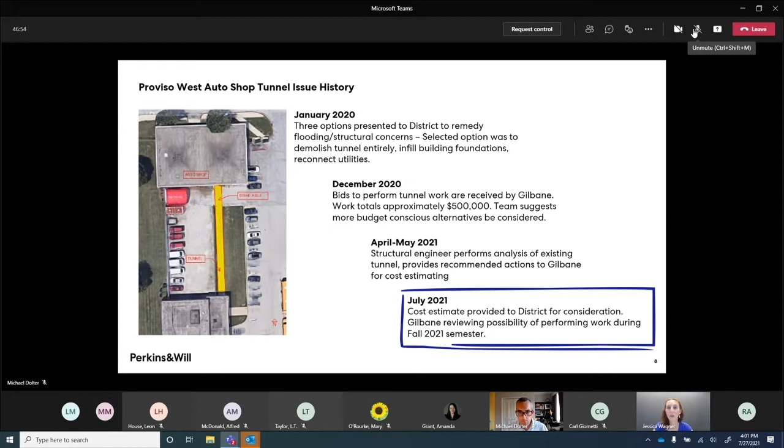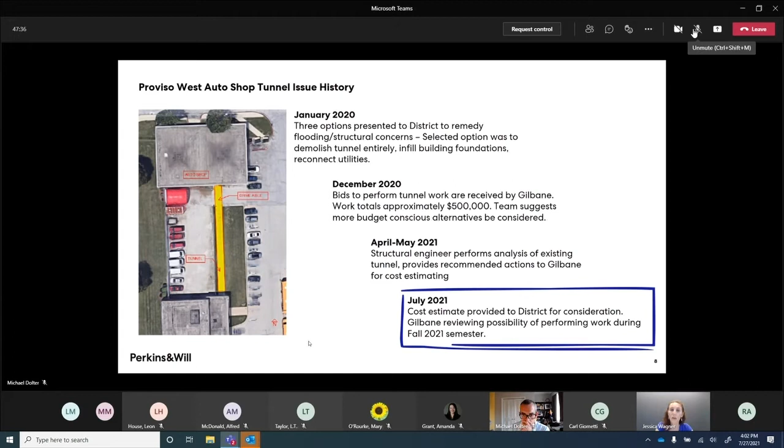So December 2020, bids came back, and at that time it was suggested that we try to pursue some more budget-conscious alternatives. This past spring, the structural engineer from C.E. Anderson went out and performed an analysis of the existing tunnel, and recommended actions were given to Gilbane for cost estimating. Now, in July 2021, cost estimates for this work have been provided to the district, and Gilbane is reviewing the possibility of performing this work during the coming fall.

So on this slide, you can see a selection of some issues that were discovered in the tunnel and at the terrazzo above. These first two images show some of the buckling that was identified just walking around the corridor, which gave us an indication that there might be some issues below.

When our structural engineer looked at this, there were a number of issues, but some of the more pressing ones were the deflected slab and the horizontal crack, as well as the corroded metal deck in the lower right-hand corner. There's also broken rebar, as well as cracks and spalls in the piers.

Diving a little deeper, expanding on some of these items: the design documents we have for the tunnel don't fully match the conditions observed in the field. There's some concern that either the depth of the concrete may not be as originally designed, or there may be differences between the concrete slab above it and the tunnel. The slab for the sidewalk and the tunnel are not supposed to be the same slab.

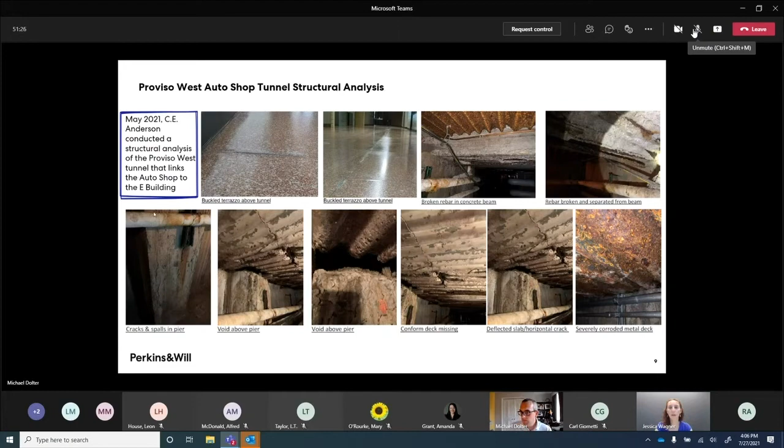So this is a much more extensive issue that has been identified for the slab there. I don't know if you're going to go into the original recommendations as well, Jessica? Not the original recommendations, just the current recommendations, but you can touch on the original ones.

The original recommendation really was - we went through 3 or 4 different options about how to deal with the water infiltration in this area, either by damming it off, the least expensive option, and finding some way to mitigate the water temporarily. Or, ultimately what was selected at the time was to take the cap off, backfill it, and essentially abandon the vertical walls in place, so this would no longer be an issue in the long term.

Every underground wall is going to leak water. It's just a matter of when and where and how much. So this is not atypical for an underground condition.

If you want to go on with that, Jessica. Sure. Okay, so at this point in time, there are two more budget-conscious recommendations.

The first is really only a temporary solution. It's to provide temporary shoring of the tunnel top slab, and this would allow vehicles to drive over this area. I believe vehicles in this area have been suspended, but this would be a temporary solution so they could at least drive on there again.

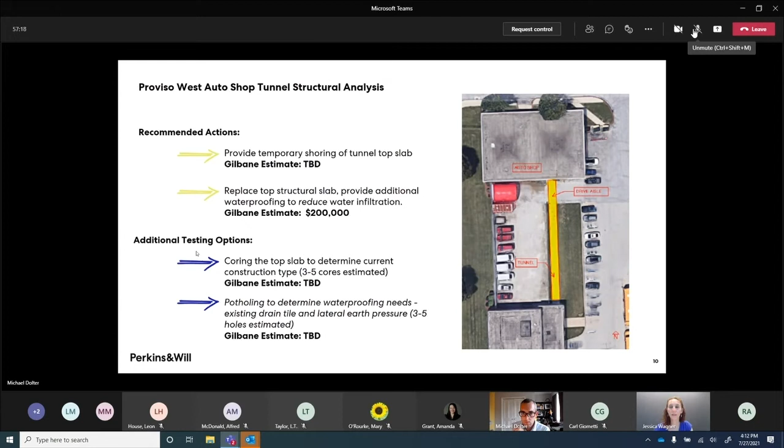We can, yes. I had a question, go ahead. For that tunnel, is there any way we can get pricing related to the shoring? It's really hard to hear you. Is there any way you could put your question in the chat feature? Your microphone just seems to be going in and out. Got it, we can move on.

Okay, go ahead Michelle. Can you all see the presentation? Yes, we can.

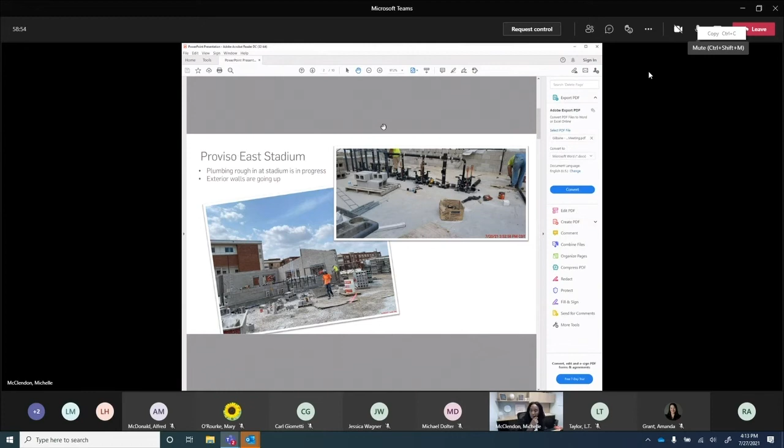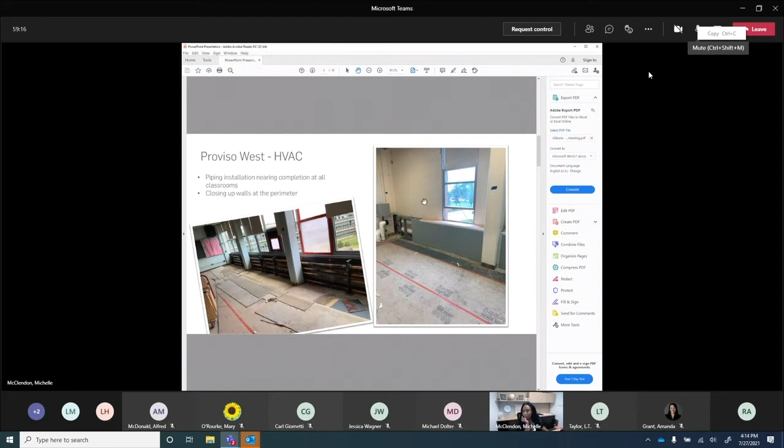Construction update for the facilities plan. Over at Proviso East Stadium, we are going up with the walls. The plumbing rough-in at the stadium is in progress, and we're moving right along at the stadium. For the HVAC, our piping installation is probably 95 to 98% complete. We have started to close up the walls at the perimeter classrooms so that we can start removing the floor protection.

We're painting in all of the areas and installing ceiling grid. Here are photos of ceiling grid being installed in the next few days. We will be dropping tile in the ceiling, removing the temporary lighting, installing the permanent lighting, so that we can work our way out of the classrooms and back out into the corridors.

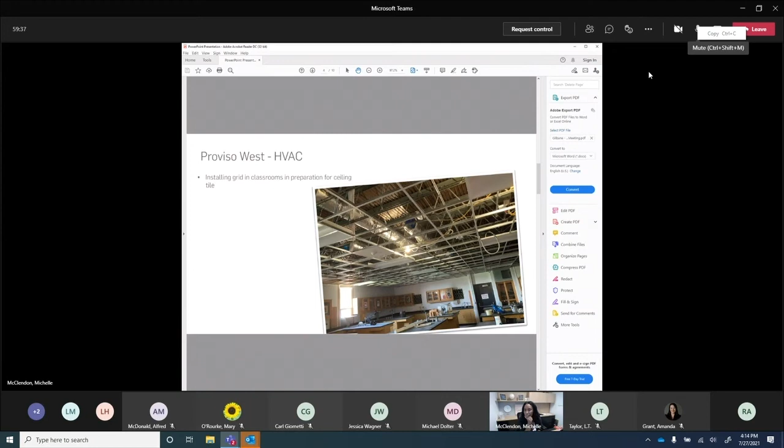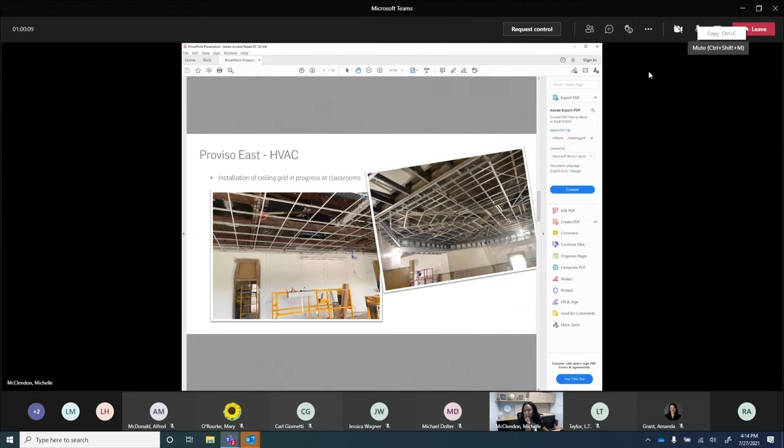Similar situation over at East. We started ceiling grid late last week, and we've already got quite a few of the classrooms completed. We will drop ceiling tile in the next week and a half as we continue to spray the rooms, finish up the ceiling, the MEP rough-in in the ceilings, and drop lights in these rooms as well. We'll work our way out of the classrooms, and then there's quite a bit of work in the hall that we ended up having to do, and then work our way out of the hallways there.

Again, painting is in progress in the classrooms so that we can wrap up the work there.

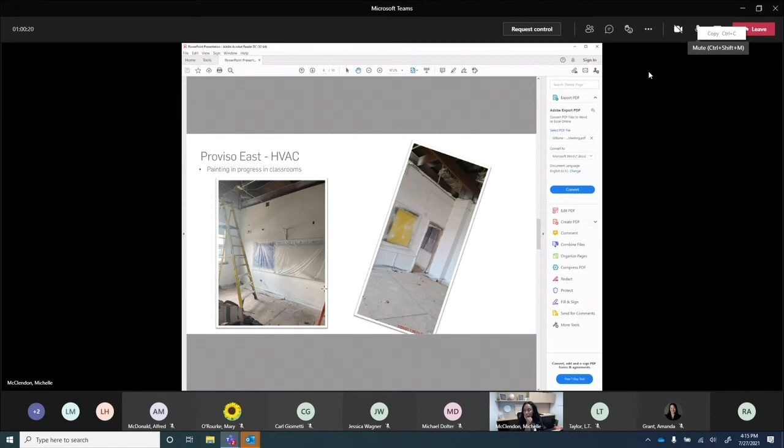As far as our interns, they are wrapping up their next to last week. They participated in several events with us through the summer. Our last two events, they both went to the White Sox game with us, along with one of their families joining us, and then a rooftop event to help them learn more about architecture, interior construction, corporate furniture, etc. Both interns participated in that.

Unfortunately, one intern will have to end the program a little sooner than we like. He will be ending on Friday due to a relocation for one of his parent's jobs. So he's leaving, but I'm headed to the site on Friday to record his end of summer presentation, and I hope to play that for you all at one of our next meetings. The other intern over at East can do her presentation first. And that's our update.

Fantastic, thanks so much Michelle. Does anyone have any questions? I'm going to get you a plant for your office, Michelle. You need some green in there.

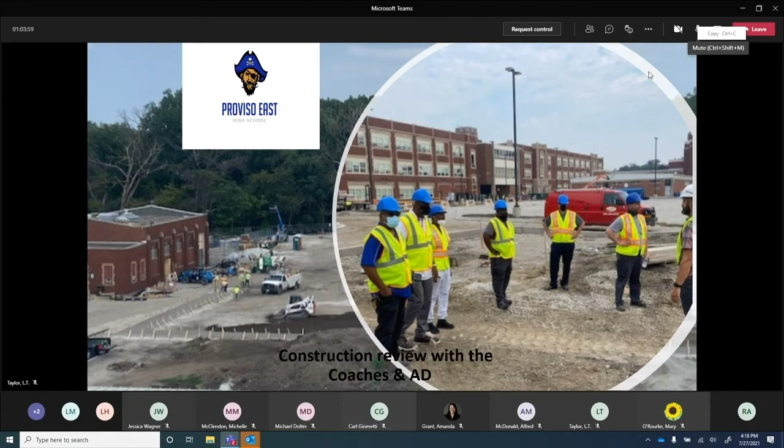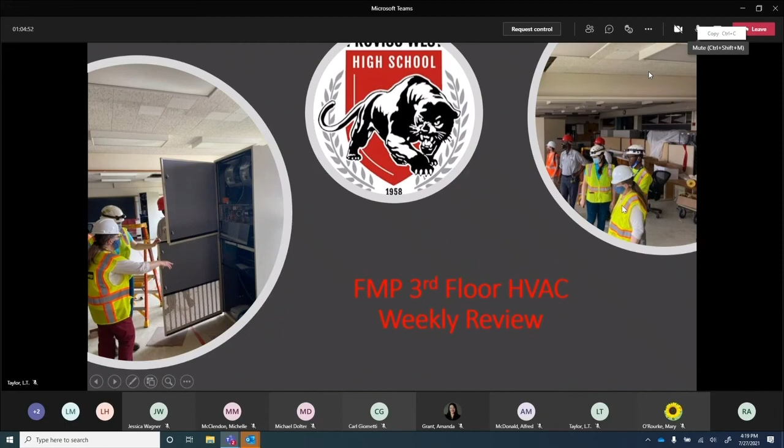This picture to the far left, it was noticed last Friday during our walkthrough with Gilbane and Perkins and Will that this drain here that supplies a main throat to drain the roofs was cracked. So we wanted to get this repaired because it's really close to the cooling towers. We're hoping to get that number under the estimated value of about $12,000. I think it came in about $3,000. We should get that change order back no later than Monday of next week.

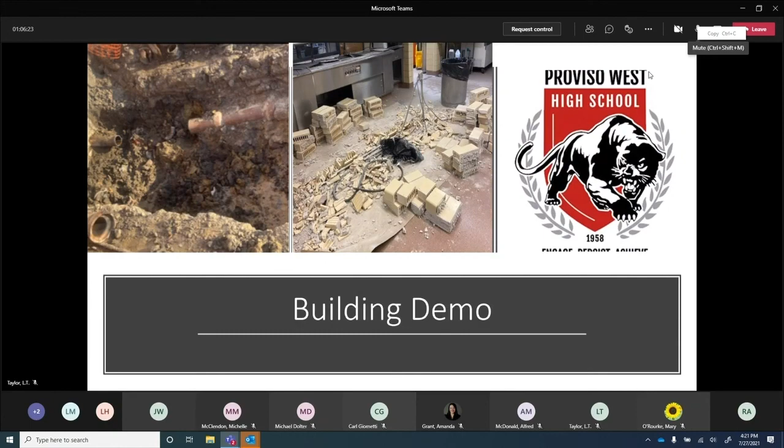The picture in the middle here is supporting documentation related to removing the old warming systems in the kitchen over at Proviso West. This was requested by our new Walker Service Group. We want to make sure that we supported them in a way to get them the proper infrastructure. All the end components have been ordered, and we will be wiring everything in once they get landed.

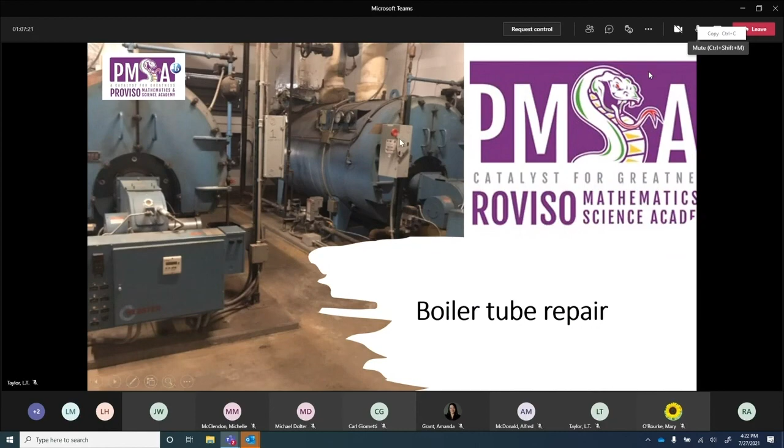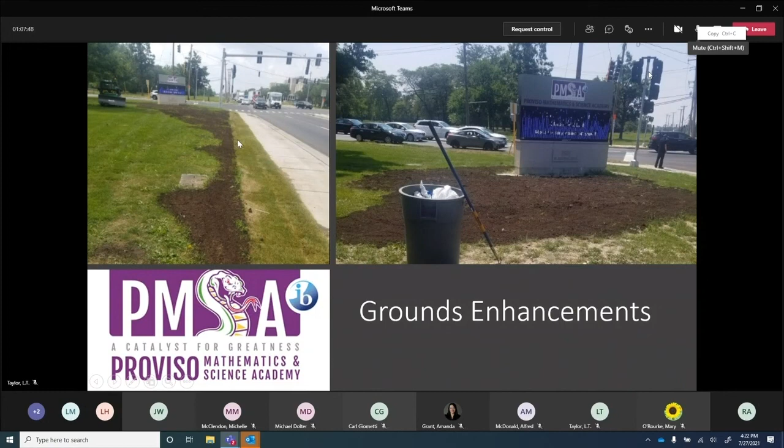Outside of that, is there any questions related to the updates? Thank you so much.